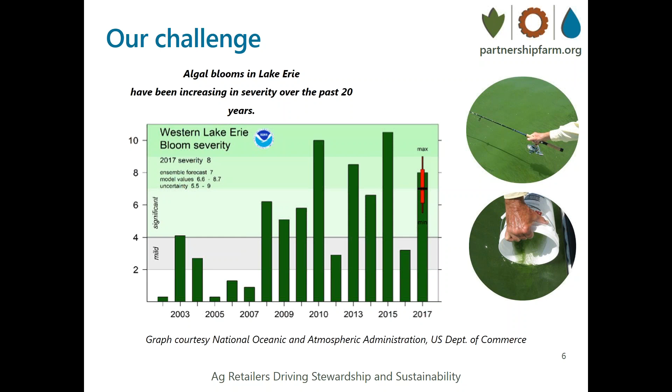So the timing of the phosphorus runoff and losses through tile drains and impacts on algal blooms is highly dependent on weather. And we know that the phosphorus is coming primarily from agriculture because of the timing of the loads. They spike during snowmelt and rain events in winter and early spring following fall surface applications.

So today we'll hear from experts about controlling water movement from cropland soil and the nutrients that move along with it. This will be a foundation introduction to controlled drainage. It's important that everyone working with farmers understand the systems and the benefits, and also the impacts on agronomic decisions. And we'll plan to follow up with a second webinar focusing on how to optimize recommendations for drainage-controlled fields.

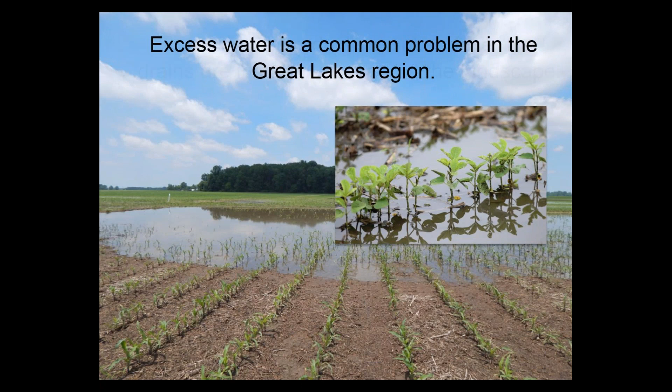And as a result, we've got this very extensive drainage infrastructure that's under most of our land. They're buried 3 or 4 feet deep, providing a plumbing network that's out of sight and out of mind, but it makes a tremendous difference in the productivity of our poorly drained soils.

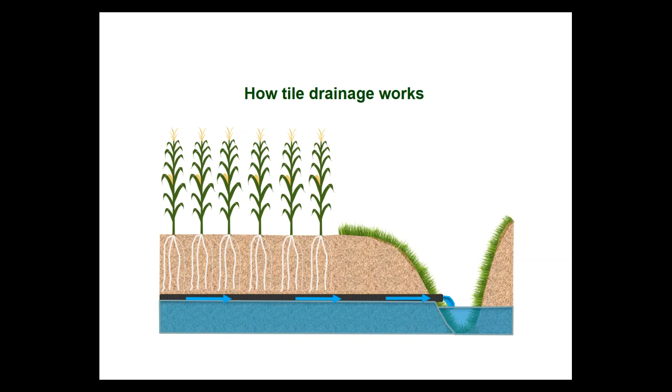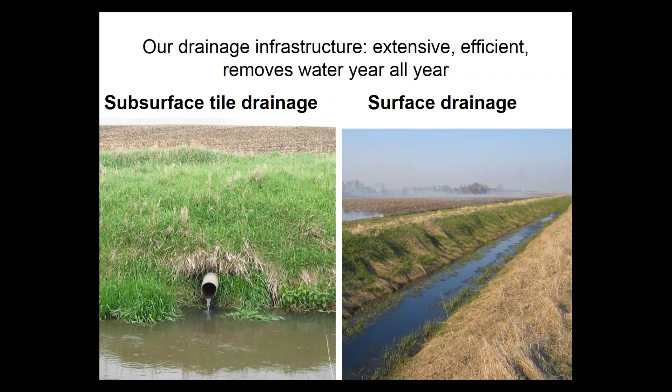So we've got this great infrastructure. Again, it's extensive, it's very efficient, and it removes water year after year. We've got the subsurface tiles and we've got the surface drains. So what's the issue? Why are we talking about something as grand as transforming drainage? So before I talk about the transformations that we're trying to bring about, let me raise the 2 issues that work together to point towards the same kinds of solutions.

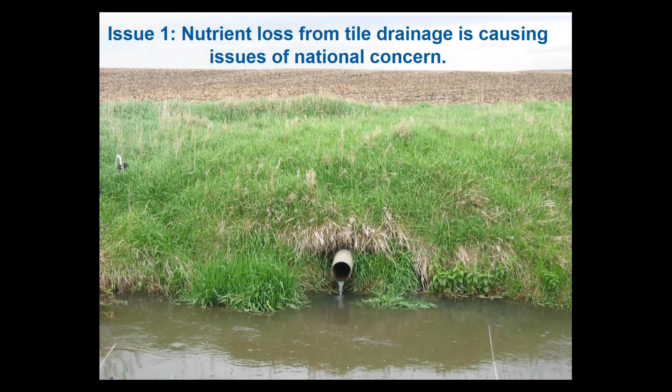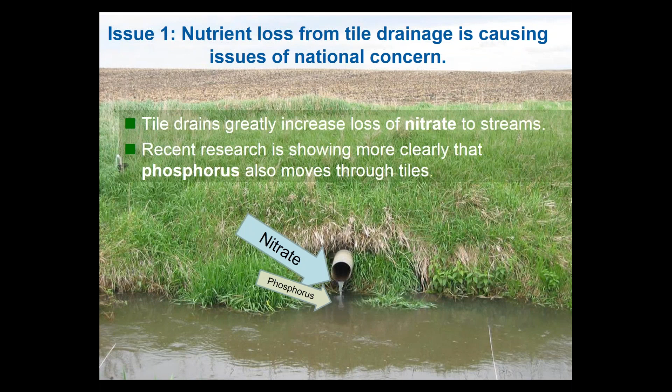The first is that nutrient loss from tile drainage is causing issues of national concern. In the introduction, you saw a little about the phosphorus loss. Tile drains are certainly the broadest source of nitrate in streams. More recent research is showing more clearly that they're also a major pathway for phosphorus. And I just have one photo here that's similar to what was shown before about Lake Erie. Now, I'm not going to go into detail on how phosphorus gets into tile drains, but it is important for everyone to understand that it does.

If you went to school a few decades ago, like me, you probably learned that phosphorus moves primarily with soil as it erodes, and that was the best understanding at the time. But like so many things, science continues to advance, and we understand better and better that a lot of the phosphorus that's getting into Lake Erie and other lakes and streams actually has moved through the tile drains. So it takes slightly different solutions than may be used in areas where there's more slope and there's not tile drains. So that's one of the issues.

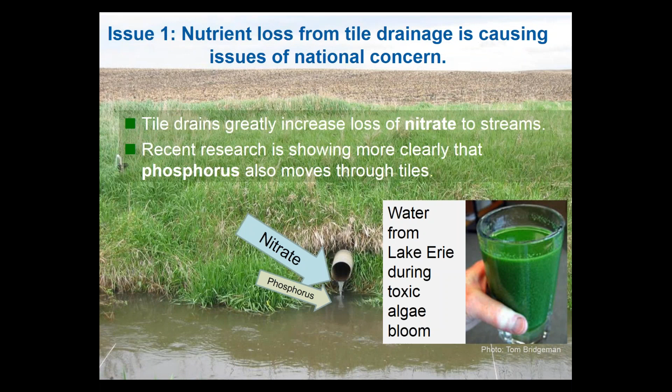The other one is that even though I've shown a lot of pictures of wet soil, and we do have that excess water in the spring, we actually have slightly reduced yields often by lack of water in late summer. We don't typically have droughts, but even in good years, there often could be a little yield bump if there was more water.

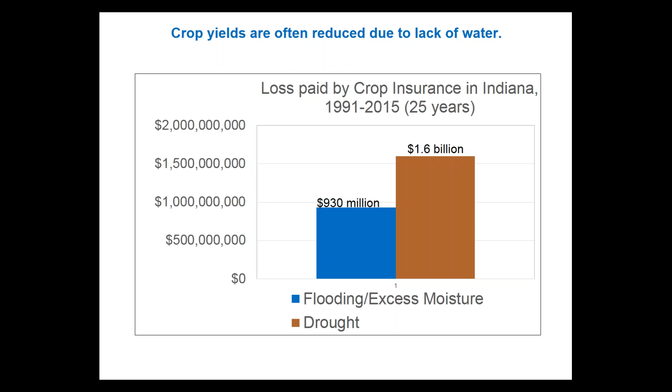And once in a while, there is a major drought. For example, just for Indiana, this shows the payments by federal crop insurance for 25 years. Here's what's from flooding and excess moisture, and here's what's from drought. So, of course, that was mostly from 2012, when the severe drought reminded many people of our potential for having too little water as well. 2015 is another year that particularly reminded us of the problem.

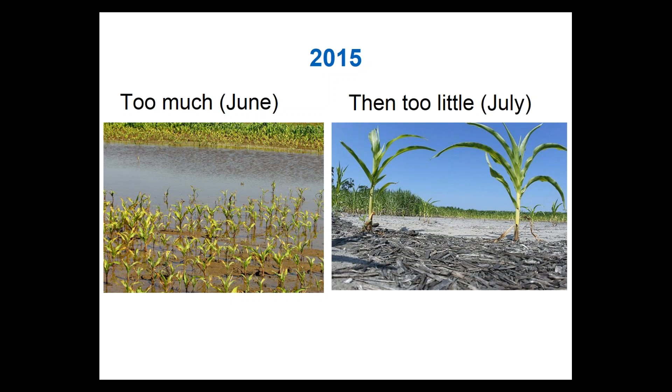In June, here's an Indiana field in June and a field in July. We followed too much by too little water, and this reminds us that having too much and too little water can even happen in the same year. So we've got these two issues again. First of all, the excess nutrients in spring causing water quality problems, and the lack of water availability. Both are not expected to get better in the future, but are in fact expected to get worse. When it's wet, it'll be wetter, and when it's dry, it will be even drier.

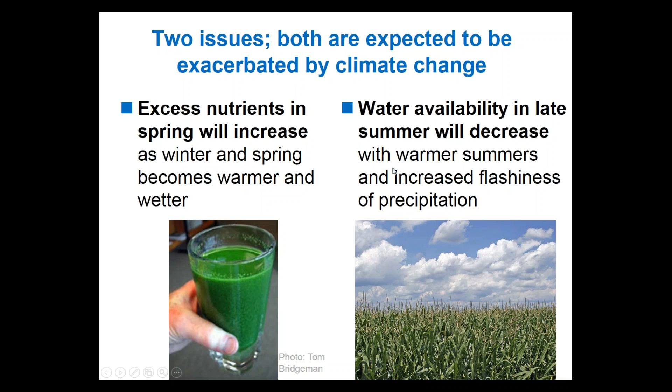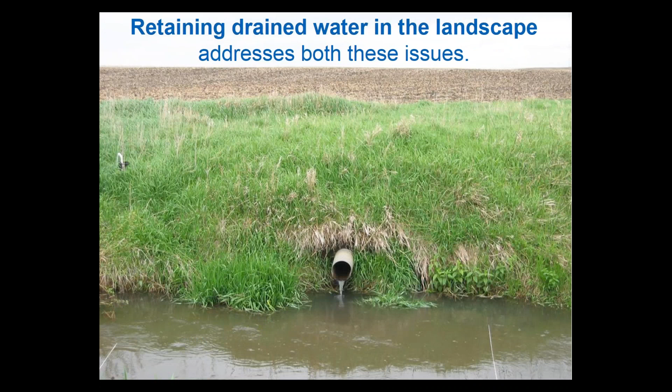So now we move to the solution. What do we do when we have sometimes too much of something and sometimes too little? It points towards a storage kind of solution. So this is what we're thinking about. How can more of the water be retained in the landscape? And that's the focus of a large project that scientists like me from 8 states, actually 9, are working on, managing water for tomorrow's agriculture, that we need to actually look at storage or retention of water in the landscape. So though our goal has been to get rid of the excess water as quickly as possible, we want to move to a different goal where we could instead store water.

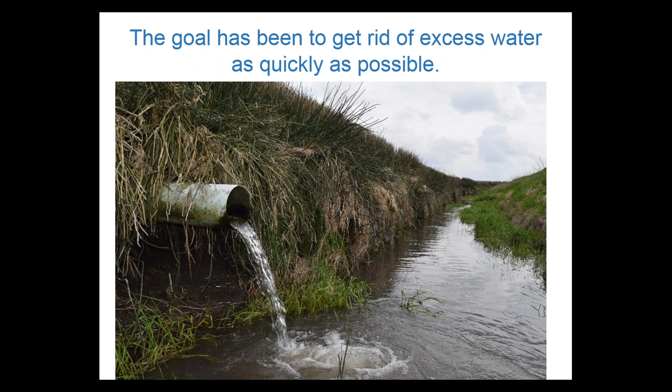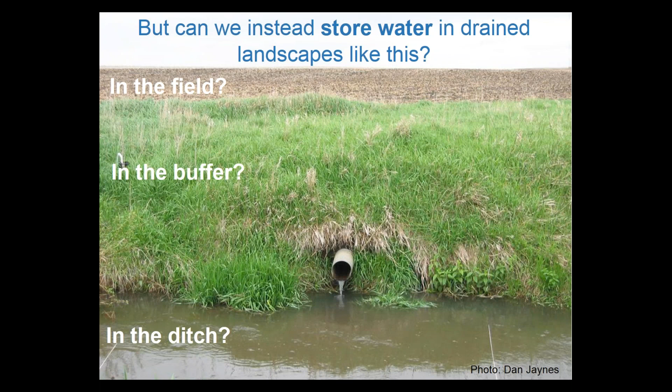But the question is, how can we store water? Our landscapes are full. They're full of cropped fields and towns and ditches and everything. So we have to look at the landscape and think where we could store water. Could we store some water in the field? Could we store it in the buffer? Because many of our fields at least have a small buffer. Can we actually store more in the ditch or downstream? So that's what I'm going to talk about for the rest of the time, practices that are being developed by scientists and engineers and tried by some innovative farmers that actually can store more of our water to address future water management challenges.

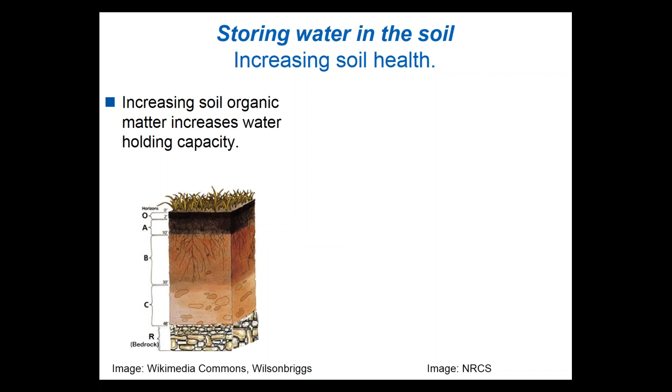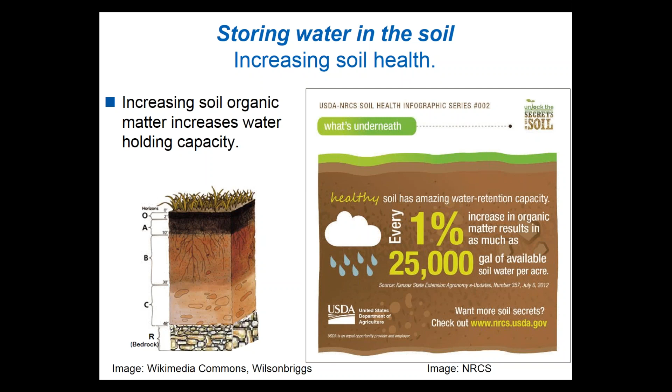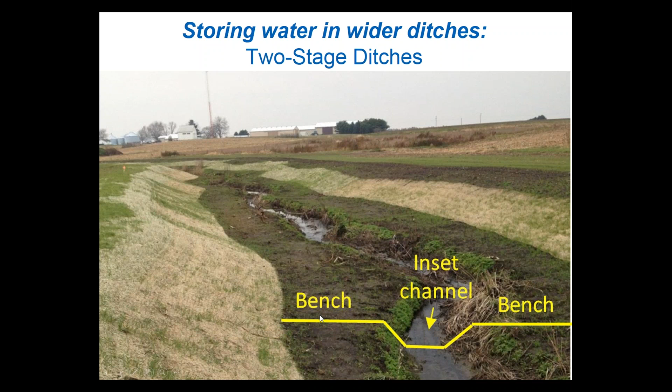Another place that we can store excess water is in the ditches, and in Ohio, Indiana, and elsewhere, there's been a move to widen our ditches to be something called a 2-stage ditch, which, as you see here, the channel stays the same, but then benches are added so that there could be much more water storage, and it's another potential. But the ones I'm going to talk a little bit about more start here. We can actually change our drainage system to hold back more of the water, to store more of the water.

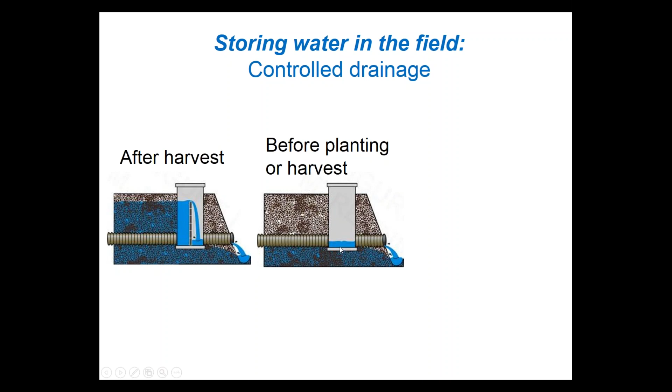And one of those practices is called controlled drainage or drainage water management. What this means is that we install a water control structure in the tile drainage system. And after harvest, we put sort of a dam in the water, and it holds the water table higher. This can be removed before planting or harvest, anytime people need to get into the field, so then it just functions like a regular tile drain. And after planting, we have the potential to raise it up maybe a little less high so that it can actually add water for the crops.

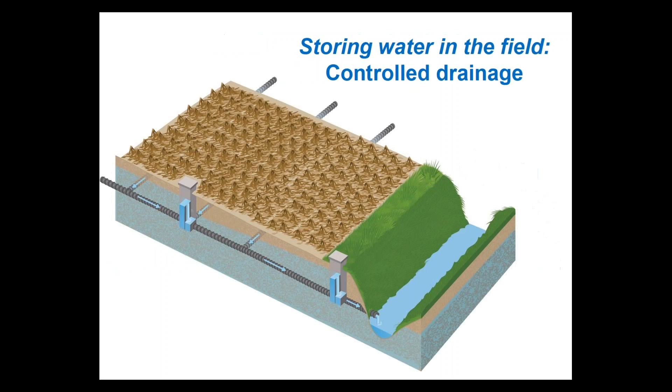This is another graphic of the same practice, but it shows it from another perspective, that we put this control structure here in the tile system. We've got a piece of field here, and the water that would go down directly to the ditch is held here in the control structure, and it raises the whole water table. This practice works best on very flat fields. When we have a field that's not that flat, then we can add a second control structure, for example, and that will raise the water table again. So I know a lot of these structures have been installed in the Great Lakes, especially Ohio and Michigan, and there's a lot of potential as long as they are used to hold back the water and actually reduce the amount of nutrients that are lost.

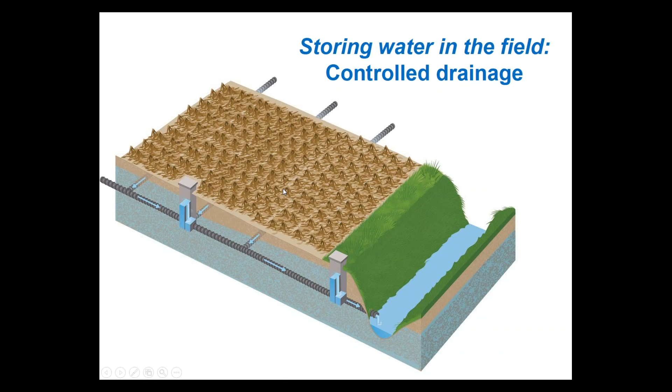I conduct research in controlled drainage, and I work with people who do around the whole region. And so our results vary, but everywhere we've shown reduction in nitrate and phosphorus loss, sometimes more, sometimes less, but there is a reduction, and increases in crop yield. They're not big increases, but they are slight. It all depends on the hydrology during any given year. So it's one of those practices that has environmental and crop yield benefits.

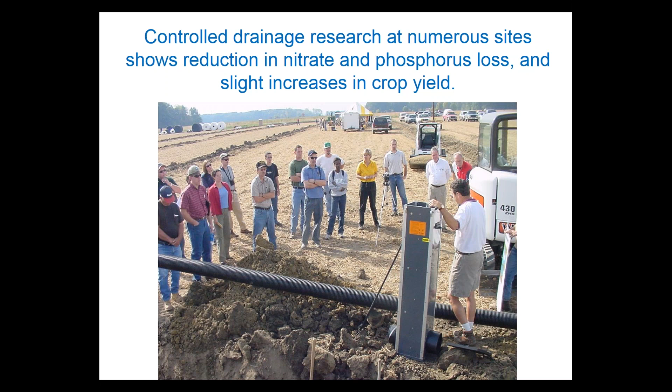Another place in the landscape that we potentially can store some water is in the buffer. Now, certain areas have buffers and some don't, but people have gotten thinking that when there's a tile drain under the buffer system, it really isn't doing any good, at least for the water that flows through the tile drains. So could we take the water that would go to a conventional ditch with its nitrate and actually distribute it back into the buffer?

So there's another tile line that's installed across the buffer so that the water flows out of the tile and into the buffer. This practice is particularly useful for nitrate, where a process called denitrification can really treat a lot of the nitrate. Unfortunately, it's not so useful for treating phosphorus because there's no equivalent process in the world of phosphorus that simply gets rid of it, but it does work for nitrate.

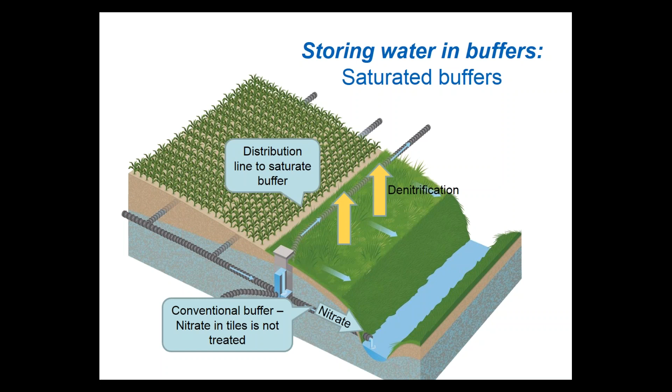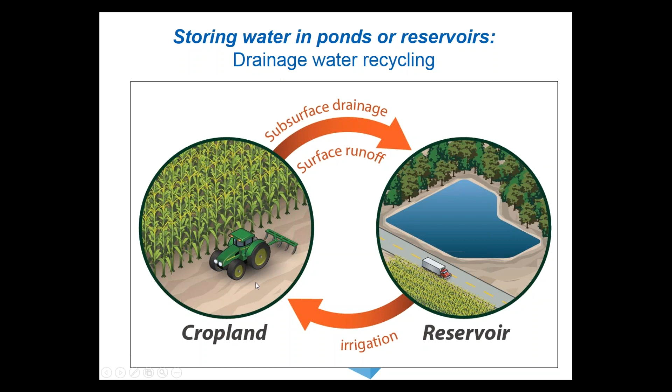What's important in this practice is that instead of the tile drains flowing directly to the ditch, the water is held in a pond, so that the same water with all the nitrogen and phosphorus in it goes back onto the field. And that's why the term recycling is there. It's not recycling water from an urban area or anything like that. It's just the water that came out of the tile, full of good nutrients if they go on the land, and now they will be used by the crop rather than go downstream where they're very harmful.

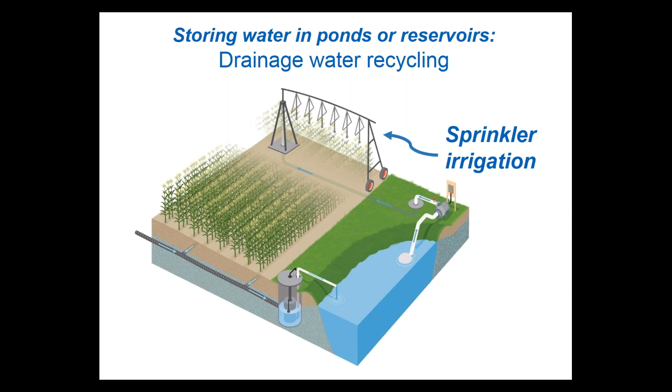Now, this practice has potential, but it's certainly not very common yet. I think there's a lot of economics and other issues that need to be dealt with. But there are a few. Here's one pond in Michigan, where it's a raised pond, and here's the system for pumping it into the pond, and then also the intake for the irrigation system.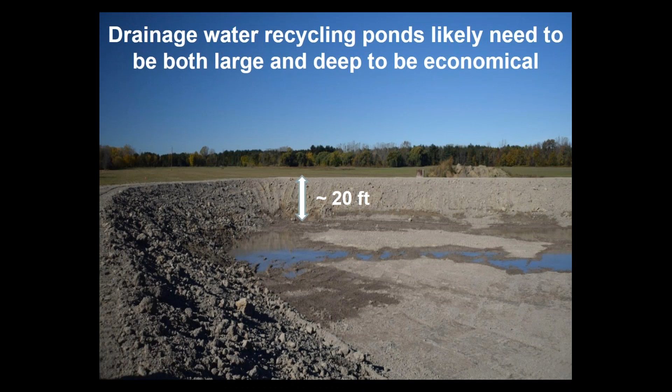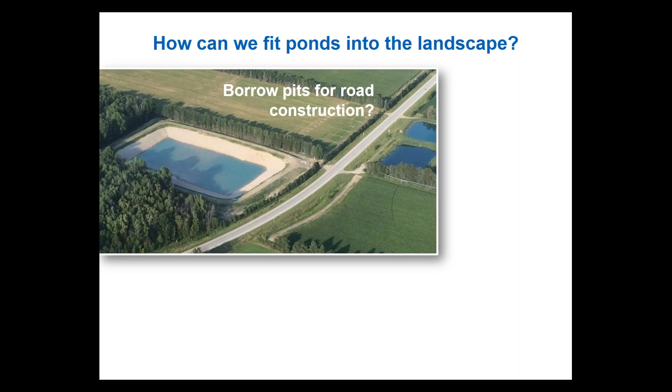So what some of us have been thinking about is how can we fit more ponds into our landscape? Now, here's just a landscape around West Lafayette, but it's not a landscape that's all alike. There are different places where potentially a pond could go. When I first started thinking about this, I was driving across Ohio where 24 was built, and there's all these borrow pits for road construction. Could they be used? And in fact, the first pond at this farm in Michigan was actually a borrow pit. There's sometimes stormwater ponds that we could use.

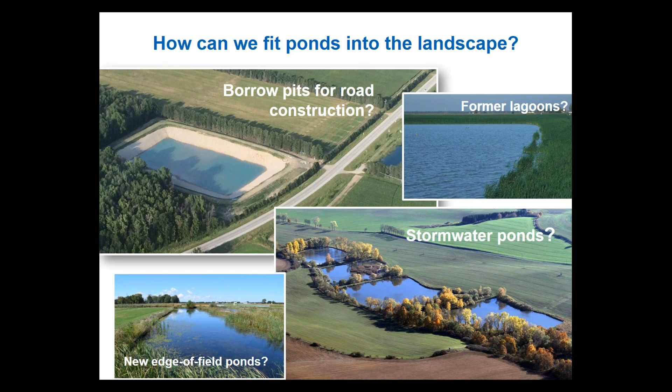The actual name is Managing Water for Increased Resiliency of Drained Agricultural Landscapes. So we're trying to advance both the goals of reducing the uncertainty and risk related to water availability, remember, having too much water and then too little, and also reduce those nutrient losses from agricultural fields, which besides having environmental impacts, also represent money going downstream. So the practices with increased drainage storage are addressing both of those.

So we have field research across the region that's looking at these, all the way from North Dakota to North Carolina, but most of us are in the Great Lakes region, and we've got sites set up where we're measuring these practices, and we have 186 site years of data that are currently in a database, and now we're looking at how to synthesize those.

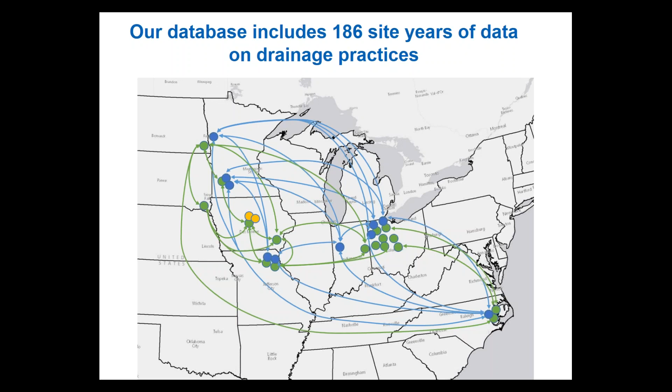So for example, for one site where I work, we've got nitrate data, and we can show how much reduction there is from controlled drainage, and then we're synthesizing it across all the sites. So I'm not going to talk about much research specifically here, but just that there's a large group of scientists that are working together to try and determine the potential benefits of these practices that store water in the landscape.

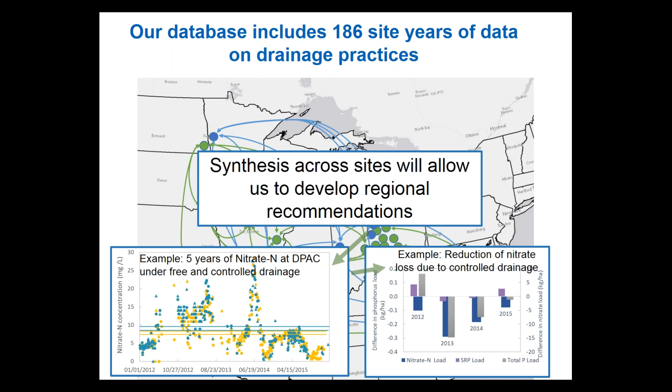And I'll just end by saying we're also very happy to get the word out. I'm happy to be on this webinar. We have a website called transformingdrainage.org. The name is the URL, and we highlight these practices and our various outputs. We've also put out publications together. For example, we've got one on drainage water recycling for the Midwest.

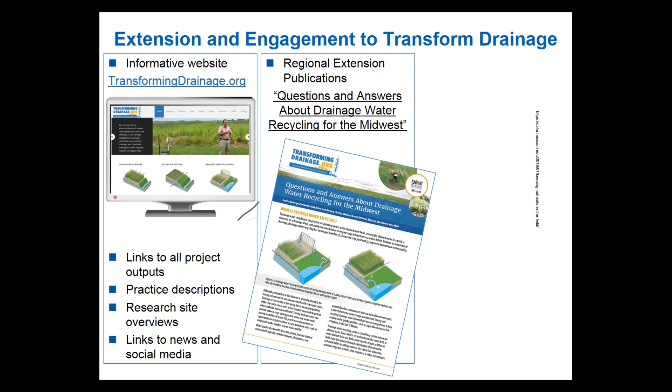And we have a lot of field days. People throughout the region are holding field days on these practices. And we also are very pleased to involve the private sector. So the Drainage Contractor magazine has talked about transforming drainage and these new drainage water storage practices. The Agricultural Drainage Management Coalition that Charlie Schafer leads, and probably we'll talk about in a minute. And we've got Iowa Soybean and other commodity groups.

So I think the agricultural retailers are a wonderful potential audience, but also actors to help in getting the word out about new drainage practices. Because to actually transform drainage, obviously it's a big task, not going to happen easily.

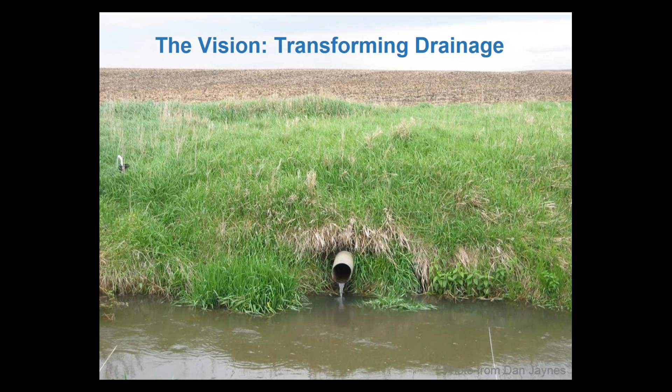And so we have the vision that we all need to work together so that the process of designing and implementing agricultural drainage sometime in the future will be transformed so that we include water retention and even water recycling, so that the nutrients that are a disadvantage now, when they just go straight into the ditch, can actually be used for their purpose to enhance crop growth. And that's what we hope will happen through these new drainage storage methods.

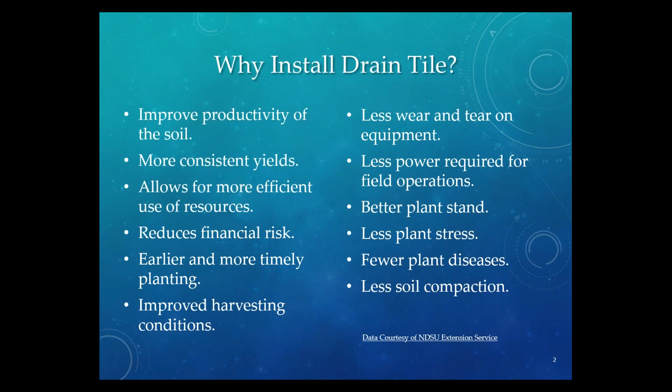But anyway, I think everybody understands the benefits of drainage tile, subsurface drainage. Jane talked a little bit about some of the crop loss and crop insurance payout. Here are a couple of graphs from Iowa for a couple different periods, about 55 years, that identify corn yield potential loss due to too much or too little moisture.

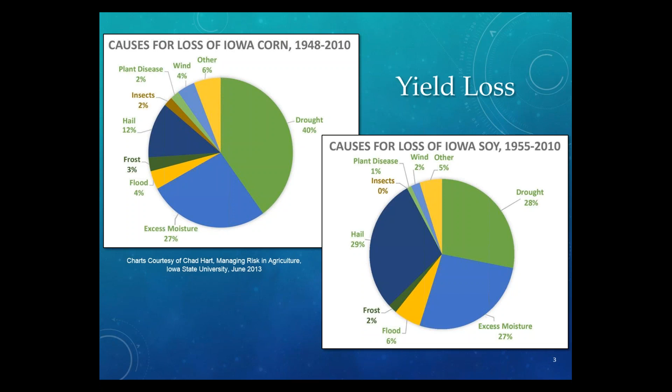And we look at over 2/3 of the yield loss associated with those conditions, and also over half of the yield loss with soybeans. So it's really dramatic, the amount of impact that excess moisture and drought can have on these crop yields. And as Jane mentioned, it can happen in the same year, too wet in the spring, too dry in the fall. So it's an issue that we can deal with with proper water management.

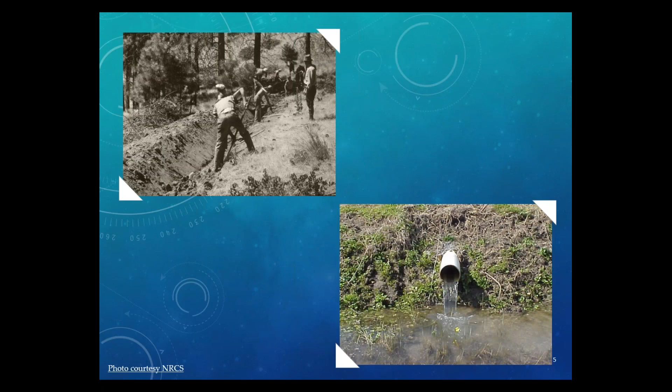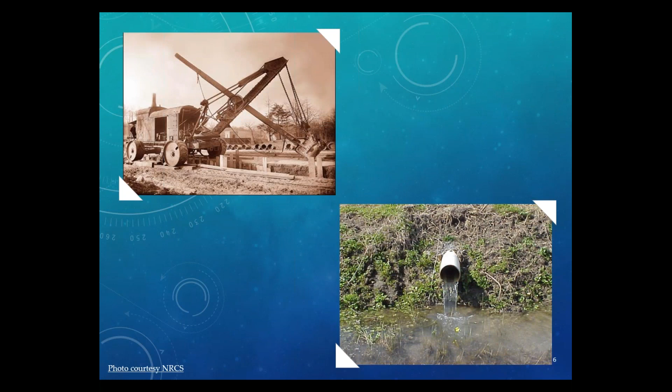In the past, we basically installed surface and subsurface drains manually, but we like to note that they were still 24/7 gravity flow systems, and they flowed year-round whenever water was at or above the elevation of the flow line of the tile. Industry got smarter about how to install these drains more quickly. We went to automation, mechanization, plastic tile. We used laser guidance, now GPS, GIS, high-speed semi-vertical chains.

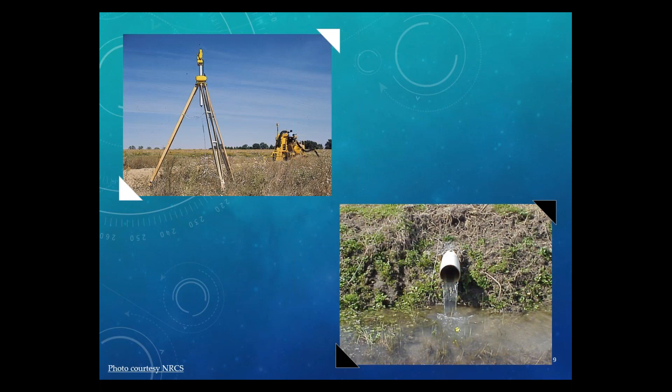But still, the systems run 24/7, so we like to think we made them faster, easier, cheaper, longer useful life, and more intensive, but certainly no smarter. They still flow 24/7, while we're steering tractors and harvest equipment with satellites. We've got precision agriculture, but the drainage industry hasn't yet really embraced some of these concepts. So that's what this is all about.

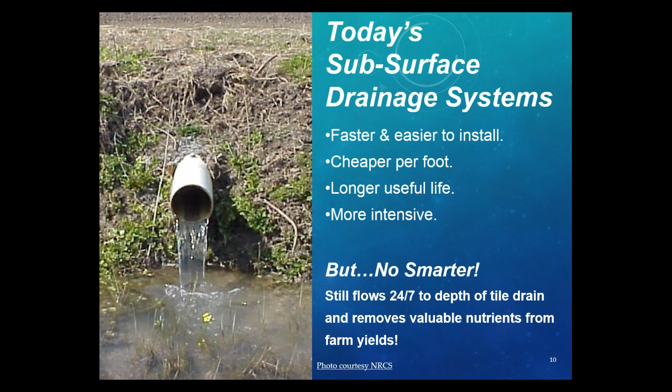Through our association with the land-grant universities and the Ag Drainage Management Systems Task Force, we learned what we like to call the golden rule of drainage, and we attribute this to Dr. Wayne Skaggs, North Carolina State University. He said, golden rule of drainage: drain only the amount of water necessary to ensure equipment access and healthy production, and not a drop more.

And what the Ag Drainage Management Systems Task Force told us way back in 2003, when we first started to meet with them, was that about half the water across the Corn Belt that leaves these subsurface drainage systems and farm fields leaves in the wintertime, when drainage isn't necessary during the fallow season. So if we just install structures and manage these outflows, we can reduce the total nutrient transport, both nitrogen and phosphorus, in about the 50% range. So it really becomes significant.

What Jane talked about was the installation of some type of structure, some means to control the elevation and flow rate of the water associated with these subsurface drainage systems. You can see here, if we install a simple water level control structure where we can add and subtract stop logs to raise and lower the water level, and connect them to the main tile line where all the laterals are hooked in, then we can create zones of influence and manage individual zones throughout the field to drain when necessary and hold water back when we can, for increased yield and/or environmental benefits by reducing nutrient transport.

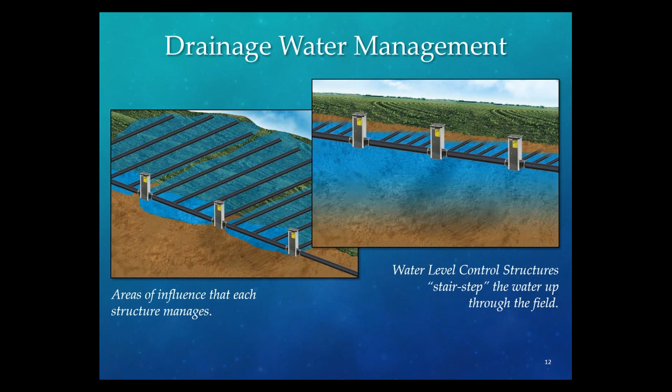If you think about a year-round schedule, in the spring we drain the fields down to ensure trafficability and good deep root growth. We reduce compaction, we warm the soils. In the summer, once the roots are established and we're out of the field, we would raise the water table a bit, maybe within 24 to 30 inches of the ground surface, to provide water and nutrients for those crops as they root down deeper in drier periods. In the fall, drain down again for harvest and field work, and then in the wintertime, raise it back up to within 6 to 12 inches of the surface to store as much water and nutrients as possible.

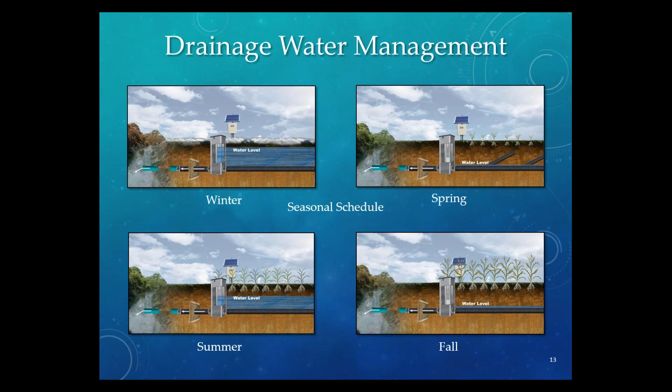There are public and private benefits associated with drainage water management.

You can see we reduce 30 to 60%. We like to think about a ballpark of 50. It varies depending on site conditions, rainfall patterns, and things like that. But all the things that Jane talked about, even additionally liquid animal waste when it's applied to farm fields that are artificially drained. So there's lots of benefits that we can get from that.

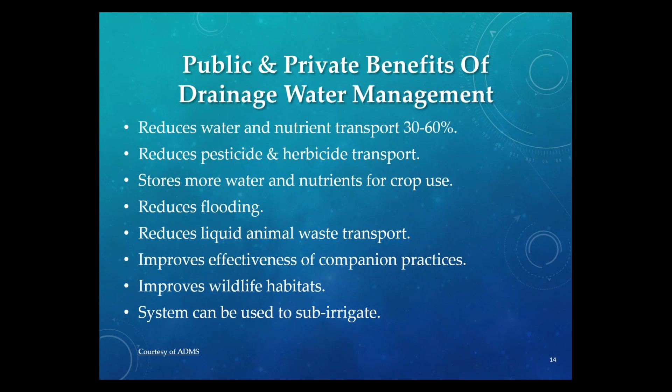Here's some interesting statistics from North Carolina State University about some yield enhancement that was achieved just with holding water back during the growing season. And so again, depending on rainfall patterns, we had some pretty significant increases at a very, very low cost to the producer or landowners. So those can be significant.

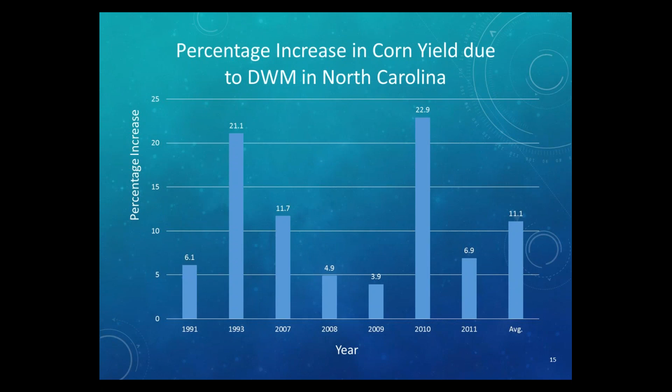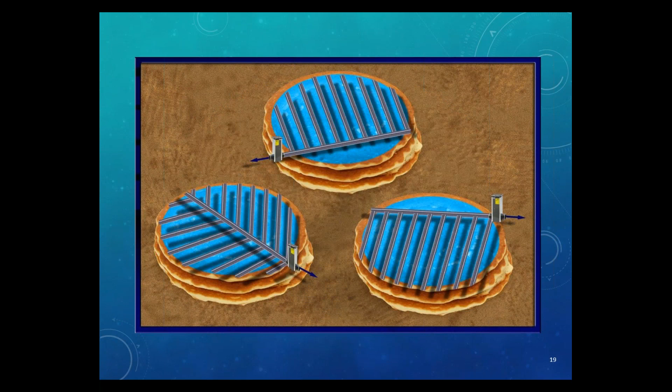So we like to think that if all the farm fields were as flat as a pancake, it really wouldn't matter how you designed a subsurface drainage system, because you could still go to that outlet and install a manual or automatic water level control structure at the outlet, and you could add stop logs to raise the water table in the soil profile, and you uniformly affect that whole field because it is flat and water seeks that flat level. But fields aren't all flat. There's typically some slope involved upstream to downstream, and so we need to think about the design consideration as we lay these things out prior to installation.

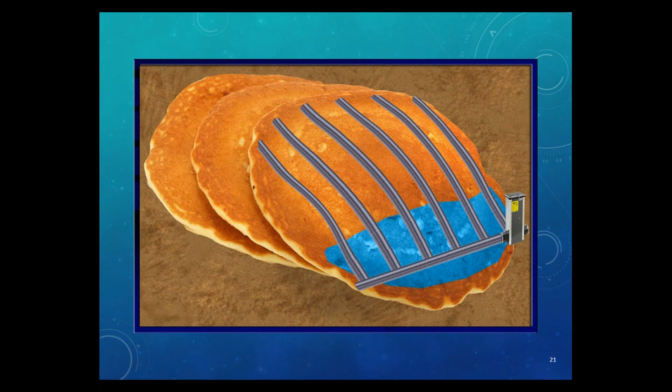And so if we put our main tile line, the collector line, at the bottom of the slope, and we run, which is typically how it's been done in the past, our lateral lines downslope and connect them to that main line, and we install a water level control structure at the outlet, then we only affect a small area at the lower portion of this field. And so it does not give us the opportunity to fully take advantage of the opportunity to reduce nutrient transport and increase yield.

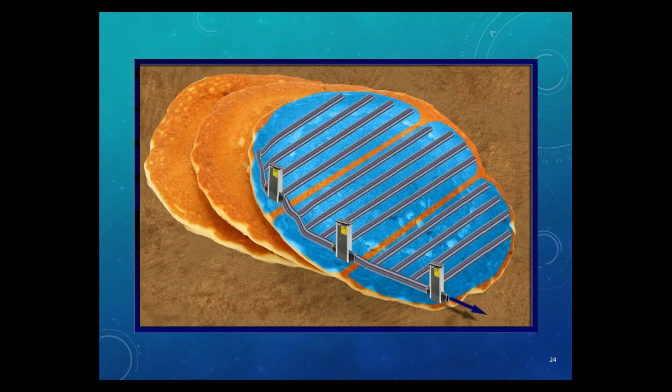And so if we think about this prior to design and installation, and we install our main line up the slope, and we install water level control structures or some device to manage the water level and flow rates at every foot of elevation or grade change, then we can affect change through the entire field up through the slopes, and we create zones of influence with each individual structure. And so that allows us the opportunity to manage a much larger portion of that land mass, that field area.

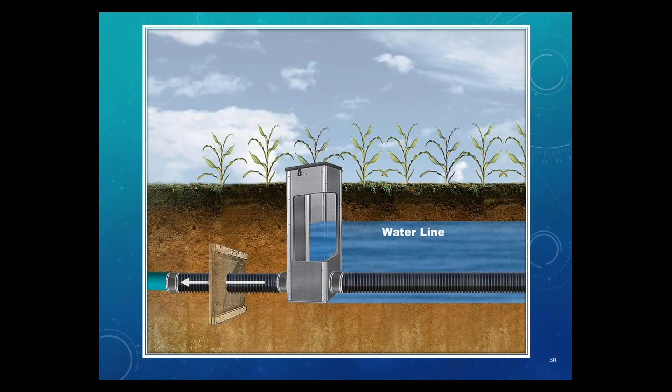One thing that we've done through the ADMC, with help from Natural Resource Conservation Service through a Conservation Innovation Grant, and working with the Ag Drainage Management Systems Task Force, was to do a demonstration project in Minnesota, Iowa, Illinois, Indiana, and Ohio to go from plot scale research work to field scale paired systems, to actually design systems where we'd have a control on one side that was a traditional gravity flow 24/7 system on 20 to 40 acre fields, and then side by side with similar soil types, same planting dates, same cropping methods, we'd have a managed system with drainage water management, and we kept track and recorded and monitored water levels and flow rates.

We looked at yield enhancement, we looked at nutrient transport, and then other things that could be unintended consequences, even down to things like earthworm counts, and soil structure, the soil profile, to make sure that we weren't creating any negative impact.

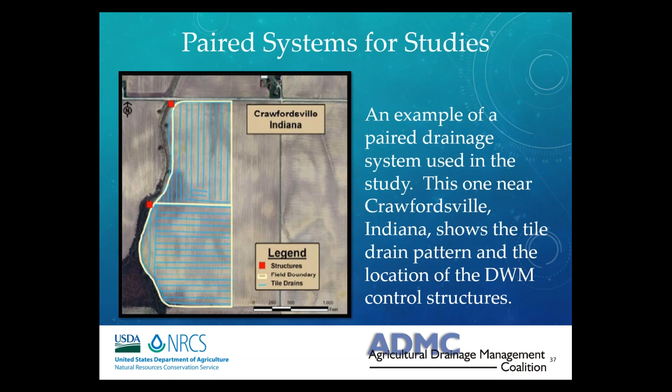Here's an example of a paired system that we studied in Indiana, and it shows how the systems were designed and installed, how we managed these systems, and then we took the results from this back to NRCS after the study, and from that, NRCS did a conservation effects assessment project, whereas they determined that the environmental benefit associated with the practice of drainage water management was significant enough that they could actually provide EQIP funding for this practice.

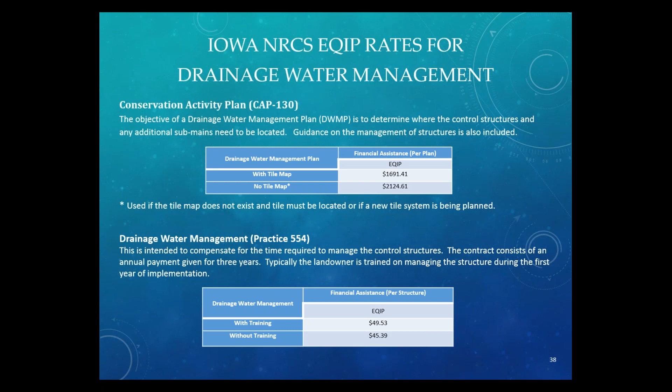And so not only do they fund the structures, the submains, and the management of these things, they actually financially provide compensation for the creation of the conservation activity plans, so the design on new or retrofitted systems. And these are just examples of Iowa, for instance, that they do for the conservation activity plan, the management of that, the structures themselves, and the subsurface drains if you need to add additional drainage to these systems for submains or things to include more acres in those zones of influence. So that's significant, and it's very helpful that we can utilize these technical and financial resources.

Another thing that the Ag Drainage Management Systems Task Force has done, in addition to these demonstration projects, is also worked through NRCS and worked with the land-grant universities to provide technical service provider training for over 130 contractors to actually go out and work with landowners to design these systems, and then since they're registered with and certified by NRCS, they're qualified to receive compensation, financial assistance for the plans. So that's a significant step forward in promoting the adoption of these types of practices.

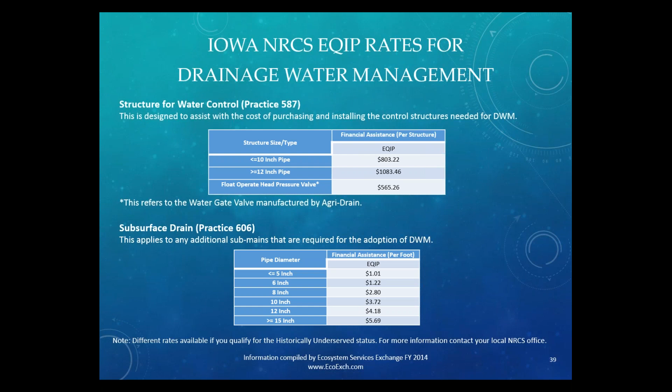When you've designed a system that you can manage and passively sub-irrigate by providing moisture to the crops during the growing season, you also have a system that you have the opportunity to actually convert to a sub-irrigation system by utilizing an external water source, either surface water, like Jane talked about, or subsurface through a well. And so basically you just reverse the drainage process by adding water back into the drainage system and raise water up into the soil profile to provide additional water to the crops.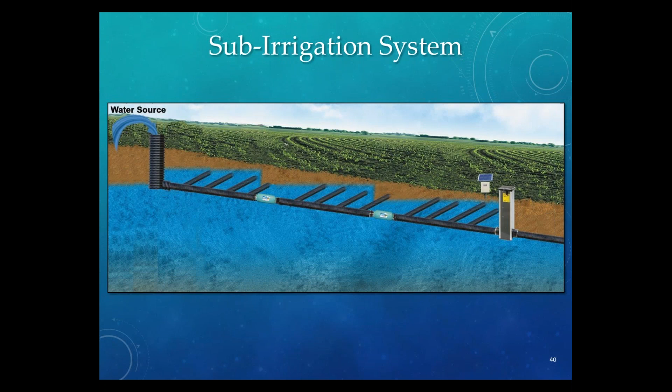agronomic and environmental benefits. So with a sub-irrigation system, that really allows us the opportunity to think about a perfect world scenario and consider, if we have the option, how would we manage this water to provide the greatest potential environmental and agronomic benefits. And you'd think about the crop, the planting date, depth of roots, need for water at specific points during the growing season, and you can establish set points through automation and or the addition and subtraction of the stop logs to raise and lower the water level, because now you have a source, you can add it right in. So you really have a perfect world scenario.

Oftentimes contractors or landowners, farmers will ask me, what kind of yield enhancement should I expect from a subsurface drainage system that's capable of sub-irrigation? And what I normally tell them is think about the best field you have that's intensively drained, and think about the very best yield you've ever gotten off that field. And they do, they remember it, and then I say, okay, imagine getting that type of water management, perfect world scenario every year, but also consider the potential of increasing your plant population and your fertilization rates, all your inputs, based on the confidence level you have that you're going to escape from those negative impact events like too much or too little water.

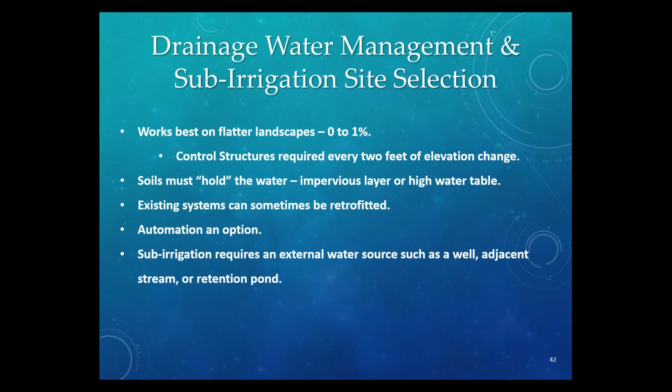We developed then through the company Ecosystem Services Exchange, which I founded a number of years back. They are technical service providers to NRCS as well, and they do design and technical assistance work on a variety of practices, but primarily drainage, water management, and sub-irrigation plans.

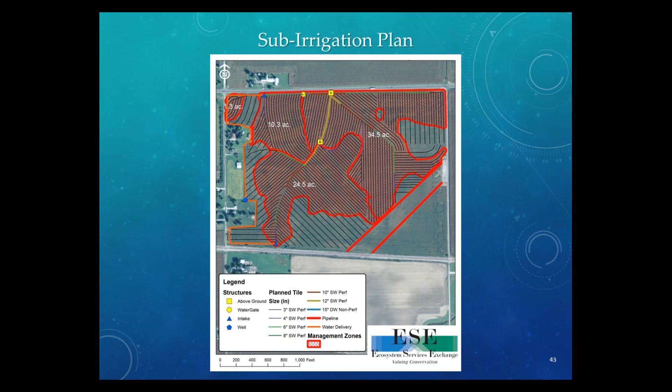So risk reduction is critical for these landowners. You know yourselves, they'll adopt new technologies and accept change, but they want to be pretty certain that there is a minimum amount of risk and a significant upside associated with it.

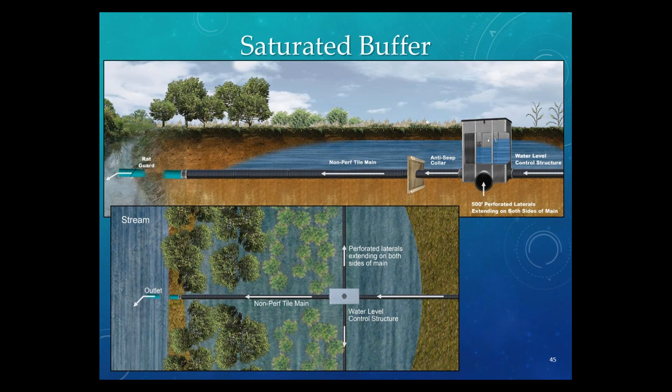Risk reduction's a big issue. In addition to infield practices, drainage, water management, and sub-irrigation, Jane talked about these practices as well. If we design these systems correctly and we take into consideration all the potential upside from the environmental aspect, we can build in these saturated buffers and bioreactors to treat the water that we do release. So we release a minimum amount that we can, back to the golden rule of drainage, but what we do release, we try to treat for environmental benefits.

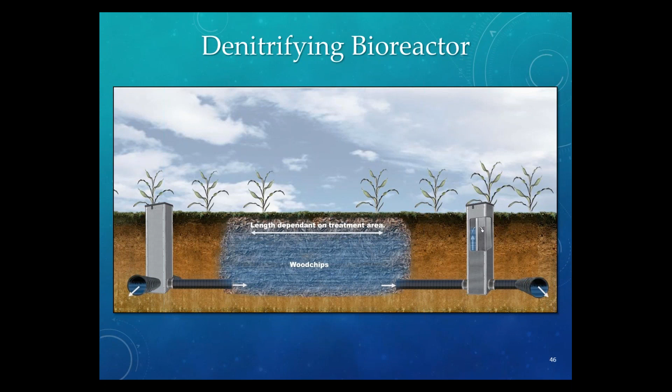We do also offer several versions of automatic water level control structures with either locally programmable timer and switch to open and close on demand. So we can manage these systems seasonally. We can have 2-level or 3-level structures with single or 2 slide gate valves, and with those, again, they can be locally programmable, so they're low cost, but they convert that managed drainage system from full depth to medium depth when you close the bottom valve and open a middle valve. And then with both valves closed for the fallow season, you have the traditional drainage water management, maybe 6 to 12 inches below water level, to maintain the storage in the field and reduce nutrient loss.